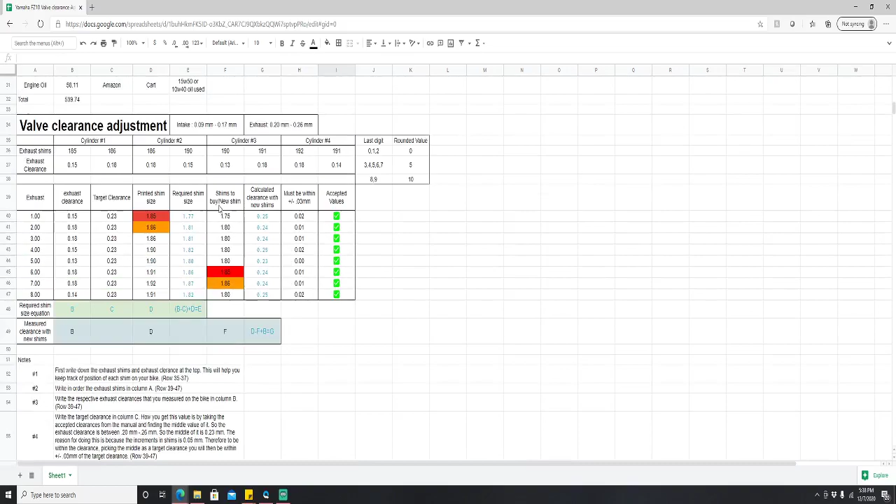Alright, so we're just gonna start off with the valve clearance. You're gonna want to know the intake and the exhaust clearances for your bike. For mine, the intake is 0.09 to 0.17 millimeters, and the exhaust is 0.2 to 0.26 millimeters. Then you're gonna want to write the exhaust shims and the exhaust clearances down, as you can see here. These are the shims and the clearances for all 4 cylinders.

Then you're gonna want to write all of these down. I'll tell you exactly what they all mean. You take the exhausts and write them 1 through 8, because there's 8 valves for the exhaust. Then you want to write the clearances and the target clearances. Then you write the printed shims that are on the shims on the valves that were on your bike. Then you're going to use this formula, B minus C plus D equals E.

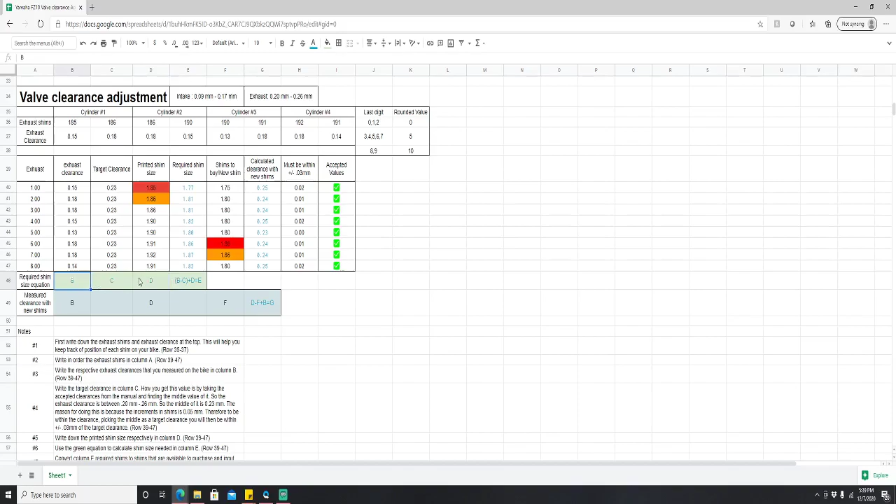And I have written exactly what all these mean. I am going to zoom in. Okay, there we go. So use this formula, as you can see right here. You're going to take the exhaust clearances minus the target clearances plus the printed shim size. This will give you the required shim size that you need.

Basically all this is doing is taking the difference of the exhaust and the target, and then adding it to the printed shim size. As you can see, these are tighter valves, and taking a small number minus the bigger number, you're going to get a negative. When you add the negative, it's subtracting the difference from 1.85 with the printed shim size, and you get the required shim size. Then you're going to want to use this chart up here.

This chart is the chart that is in the manual, and basically you're rounding these values. Now for those of you following along with the manual, they actually put the 7 on the bottom, rounding it to a 10 value, which doesn't make sense to me, because 7 is 2 away from 5 and 3 away from 10. So I put that back on the 5.

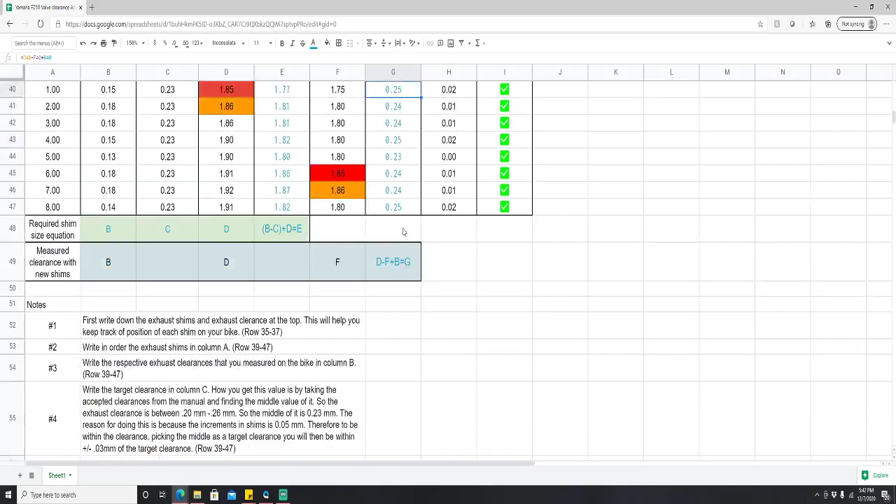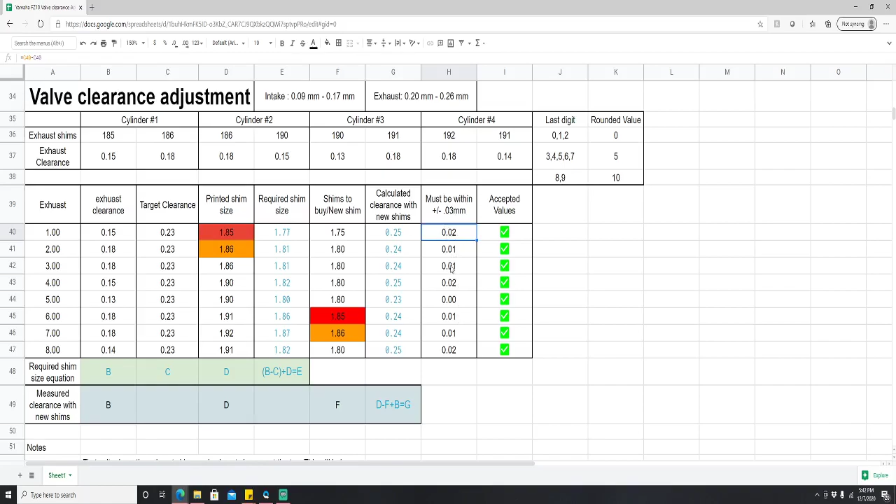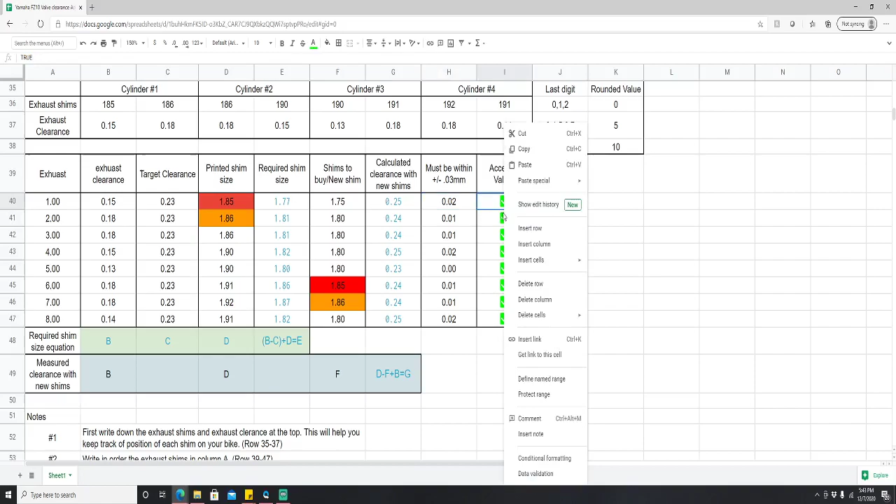And I have this here, which is basically the shim size that you bought minus the target clearance, and all you want to see is that these are within 0.03 millimeters, because that tells you they are between 0.2 millimeters and 0.26 millimeters, because the target clearance is 0.23. So 0.23 is 0.03 in from the exhaust clearances. And I just checked, and these are correct.

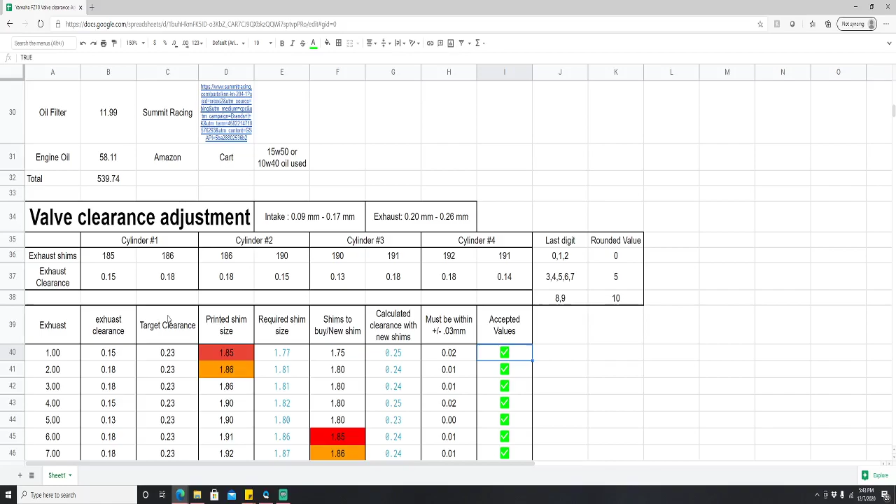So we come back here, the orange and the red. Pretty straightforward. I took the shims from the factory that were in the bike already, and I'm reusing those shims along with new shims that I need, putting them where they're needed, and that'll save you a few bucks. I'm pretty sure they're like $8 each, so you're saving $16 there.

Okay, and that's how you do valve clearance adjustment. Now, I also have this for you guys as well. Per manual, you're supposed to replace the seals and the gaskets. Now the thing is, you're supposed to do this at 23,000 miles, because that's when the valve clearance adjustment is required.

The problem with that is that if you ride your bike very aggressively, always at high RPMs like I do, then your valve clearance adjustment is gonna come sooner, and you will know sooner. I might not have mentioned this in the beginning, but you know you need a valve clearance adjustment when you start hearing hissing, when the bike's starting to have a rough start, you're getting poor gas mileage and things like that.

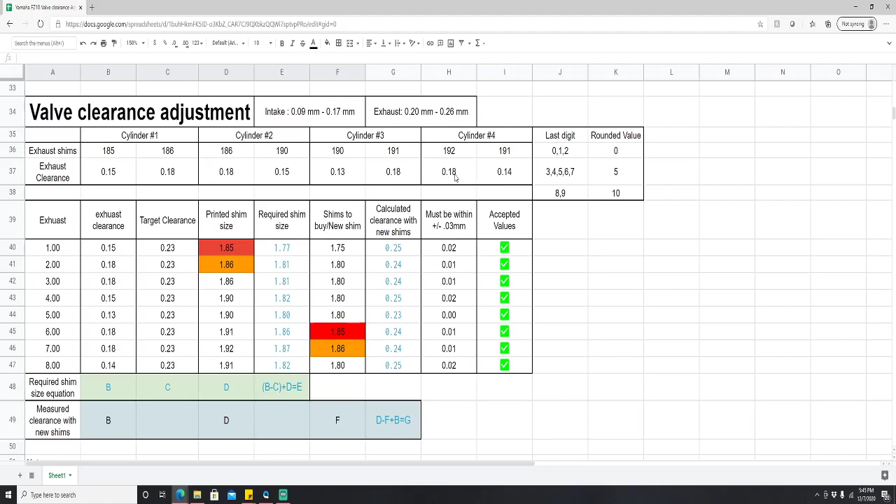So that's why I did my valve clearance adjustment at 17,000 miles, and as you can see, the exhaust clearances are way out of whack. I should be having like 0.2 at the least clearance. Okay, so since those are out of whack, you gotta do them.

Although the head gasket, you'll see it, you'll know. I think you should replace those regardless, because I've heard of so many people having problems with leaking head gaskets, and you don't want oil leaking out of your head. So just replace it. Of course, this is my opinion. Your bike might be different, so you guys do whatever you gotta do. But I'm gonna be replacing the head gasket, no matter if it looks okay or not.

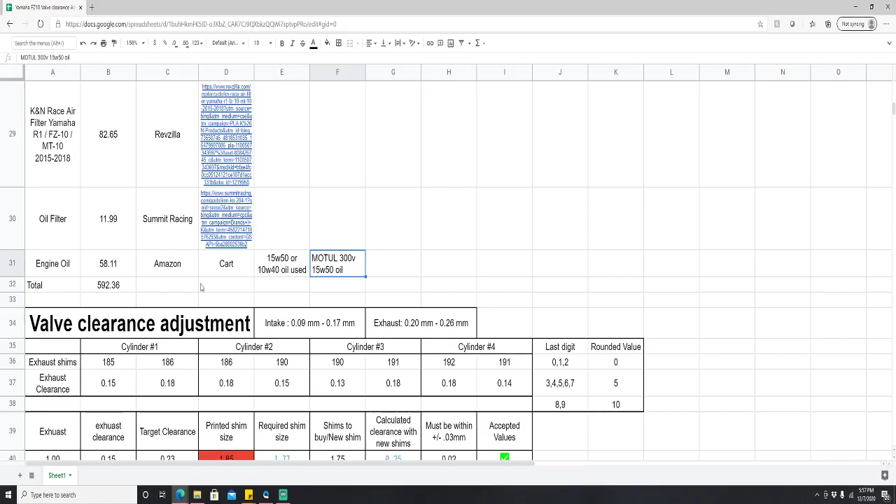Loved it. Fantastic. And what's great about it is it's green, right? So when it gets dirty, you'll be able to tell a lot better because it'll be like black or whatever, and then you'll know you got to change it. So this stuff is awesome. Love it. Okay, it's what I get. So there we go.

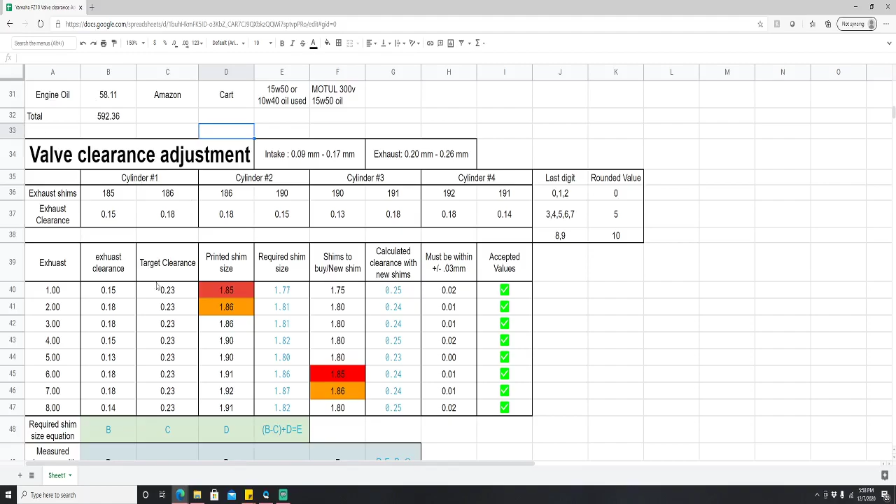So to recap: valve clearance, parts that you'll need per the manual to replace, the fluids you're gonna need while you're reinstalling everything, some of the parts that I'm getting for my bike personally, and the actual procedure of the valve clearance adjustment, and then some notes as well, restating how to do this.